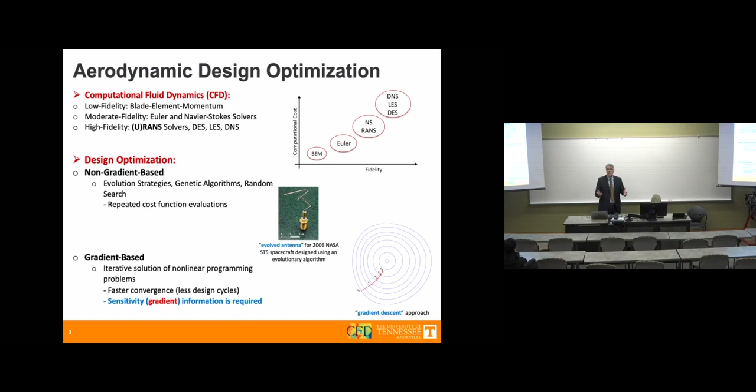So the important thing here is the gradient information, which is a derivative—it can be very difficult to calculate. And if you have an existing CFD code, it may be difficult to come up with the optimization scheme, so we have to use some smart way of approaching the problem.

So all of the results I'm going to present today are based off of the automatic differentiation tool that my group has developed, and we have implemented it in an in-house solver—yet another in-house solver. But we wanted to have something flexible, that can be applied to different flow regimes.

Now I'm getting into the dangerous territory of having a single solver solving all problems. No, every solver has its limitations, but if you know how you're handling the problem, then you can get pretty reasonable engineering accuracy solutions. So our solver is called UNPAC.

It's grid transparent, meaning it can assume unstructured mesh, structured mesh, or a combination of those. So that's a good positive thing to have.

And it's Reynolds average Navier-Stokes with time accurate and harmonic balance time integration schemes. Harmonic balance is important because if you have a time periodic flow, it reduces down the computational time significantly. And that was my bread and butter when I was at Duke University when we were doing turbomachinery aeroelastic simulations.

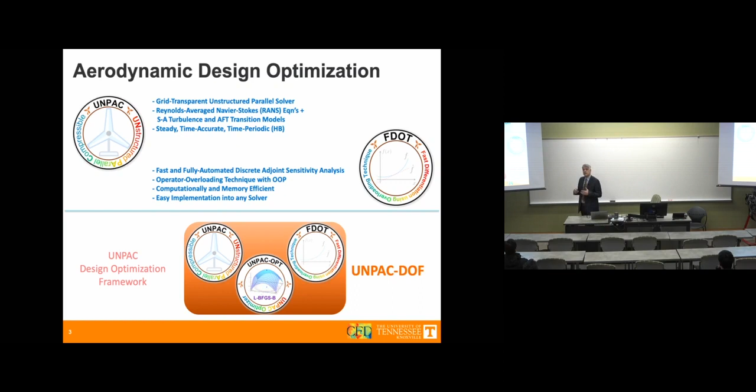That compiler takes your CFD code, differentiates everything, reverses the order, and spits out another code. So, of course, because this is done at a compiler level, the number of bugs that are introduced during the process is quite large. So you have to go back and hand check everything. Although that's an extremely useful tool, it still requires a lot of user intervention.

So our flow solver, as I said, is called UNPAC. Nothing special here, a couple of things that we focus on. It has the Spalart-Allmaras turbulence model with Dr. Edwards' modification. And we have Coder's AFT transition model, so we can predict the transition for natural laminar flow configurations.

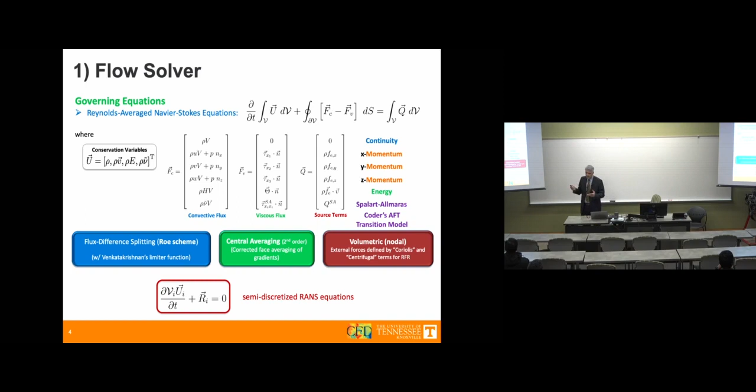The adjoint solver—I'm just going to define the optimization problem first. We start with an objective function I. I apologize, I'm not very used to using these. What can that be? Lift over drag for turbomachinery applications, minimizing the total pressure loss. It can be anything that you define.

So the problem with adjoint methods is once you change your objective function from something to another thing, you have to recompile the entire solver to get the adjoint version.

So here R is the residual of the CFD solver. As I mentioned before, most of the optimization problems are done in steady state, but nature does not really behave that way. There's always unsteadiness, but so far every flying configuration has been mostly designed based on steady assumptions, time average assumptions.

The idea is if we have to drive the residual of the CFD solver to convergence, that's a positive for us. If it's an unsteady problem, then that completely breaks down. But there are ways to overcome that issue.

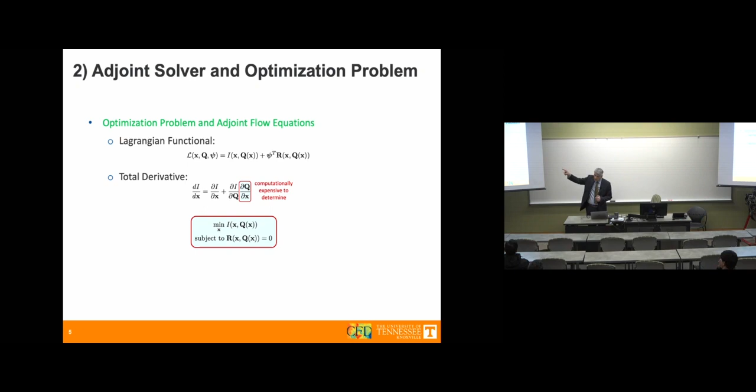So because of that, we have to do something about circumventing the computation of that term. I'm not going to go into detail. This is a classical adjoint formulation.

Apologies again. At the end of the day, if you solve an adjoint problem to the CFD using this approach, you end up with an equation something like this. So dR/dq is the Jacobian transpose of the residual of your Jacobian for your CFD solution. Psi is the adjoint variable, and this can be easily calculated using a differentiation tool.

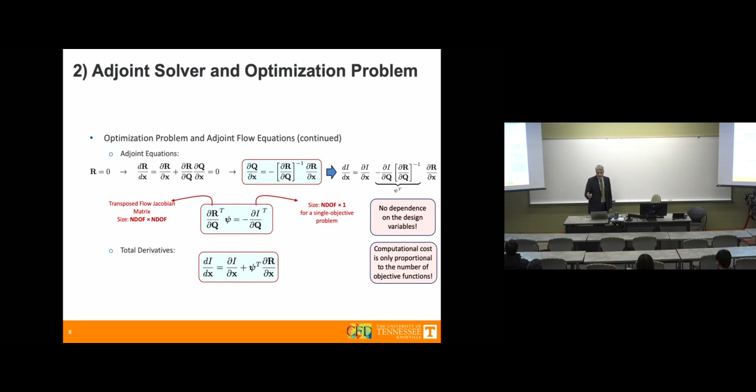Once you have your psi, then your objective function can be calculated easily. So the size of this problem is much smaller than calculating the objective function and taking the derivative with respect to each design variable.

So there are two approaches in adjoint design optimization. The first one is the continuous approach. This was first applied to computational fluid dynamics by Jameson, Anthony Jameson. If you work in CFD, you may know him. But it is the first approach, though it requires significant code development. So we tried this for simple 1D nozzle problems. Yes, it can be done, but the boundary conditions are the killer. It's almost impossible to come up with a good way of approximating the boundary conditions.

The second approach is the discrete approach. This is most commonly used by designers, but as I mentioned before, it's cumbersome because it requires source code transformation like Tapenade. You feed in an entire CFD code, and what you get is not a working code. So you have to really spend a lot of time to debug that, to make it work. And another thing I mentioned before is anytime you change the objective function, you have to recompile your code, right? It is not really feasible if you want to define objective functions on the fly.

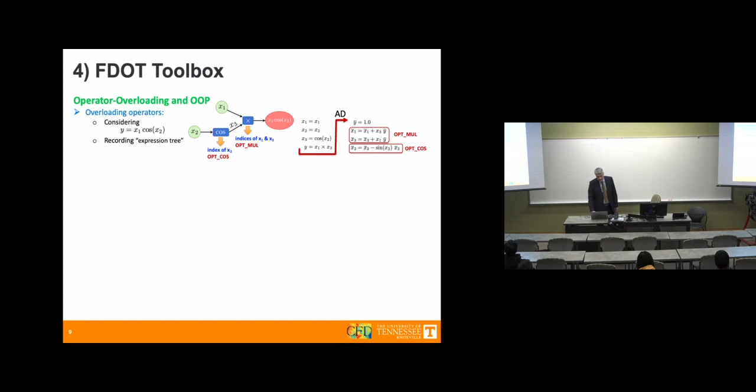So once you have that, the solver spits out an equivalent code, or the compiler does. Our idea is, starting with elementary operations like multiplying two numbers and then taking the cosine of the product, for example, what we can do is use what is called operator overloading. If you know a little bit of computer science, you can define variables to have multiple values—so you can define a new variable that has the CFD solution stored and also its derivatives stored. You can use operator overloading to redefine elementary functions. For example, when two numbers get multiplied, your adjoint solver may multiply those two variables and also take the derivative. So you have to go in and redefine all your elementary functions: multiplication, division, cosine, sine. If a sine function is called, you have to input that the derivative is cosine. And there is also the chain rule. Probably 40 or 50 fundamental operations need to be redefined.

So the idea is, if I take my input, a CFD solver is nothing but a finite number of function evaluations. You initialize your flow field, you do some operation to your flow field, and it ends up with function 2—so this is an accumulation. You can think about this as a big tape. At the end of the day, your output is what you're interested in, your objective function.

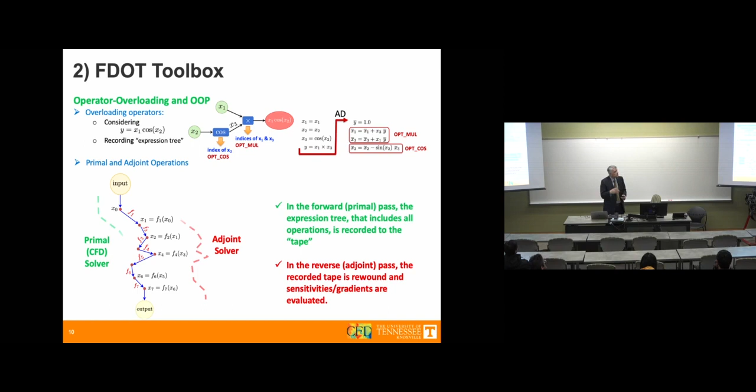The important part is, if you have a fully converged CFD solution and you run one iteration, the solution is not changing anymore from one iteration to the other, you only need one sweep of that operation tape. What you then do is take this and start from the end, then go way back to the starting point. This way, in the adjoint solver, you calculate your derivatives and have your sensitivity information calculated.

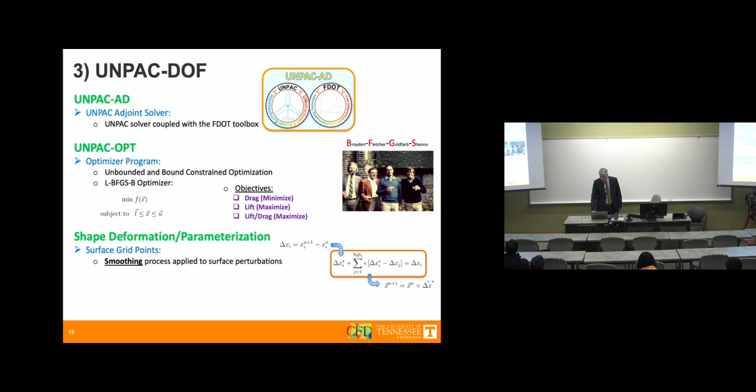But this is simply like a Newton method to converge to a minimum solution. Okay, so boring stuff out of the way, I would like to show you how we apply this idea to some problems.

This is very classical: the design optimization starting point is at a NACA 0012 airfoil at a Mach number of 0.8 and angle of attack of 1.25. The original solution yields a strong shock at the suction side and a weak shock on the pressure side.

Also, the design variables are defined by FFD. FFD stands for freeform deformation box — this is like Bezier curves. So if you think about somebody playing a puppet, if you pull the string a little bit, it smoothly changes the shape of the airfoil. This is very commonly used in aerodynamic design optimization.

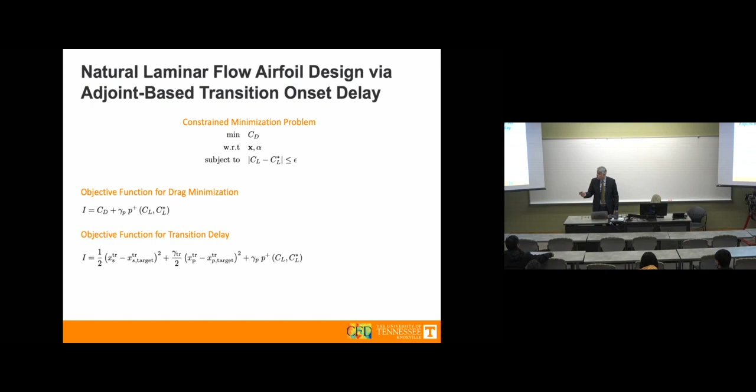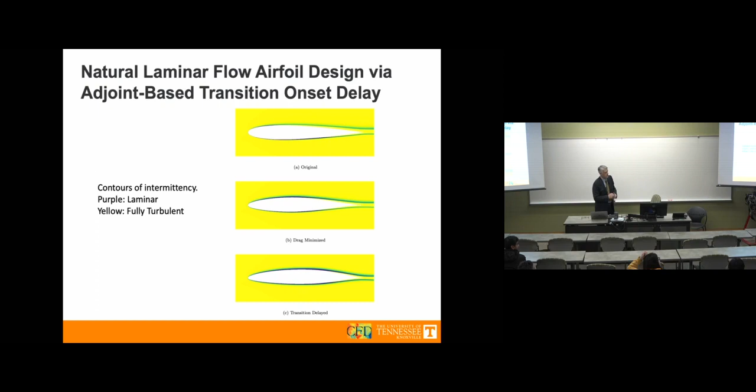How many minutes do I have? 15, okay. Any questions so far?

All right. So I have a question. I've done optimization of surfaces for drag reduction using software like iSight and things like that, where we don't really change the equations, we are just using an automated, traditional scheme. So yours will be a lot faster than that, do you think? Yeah, so is iSight similar to what Dakota does, like runs a lot of CFD simulations and does a stochastic approach to minimize? So you can set one objective function and basically run the whole thing.

Run the whole thing, so it takes quite a bit of effort, right? Typically it takes one week for one case. So yeah, okay, so here you can see for this case, a gradient-based design optimization will require 6 cycles. 6 cycles include 6 CFD solutions and 6 adjoint solutions. So an adjoint solution is about 3 times the CFD solution, right?

So it's about 24 CFD solutions worth. So I don't know how many, 144. So this cuts down quite significantly the optimization time. Of course, it also depends on how many design cycles you have to do.

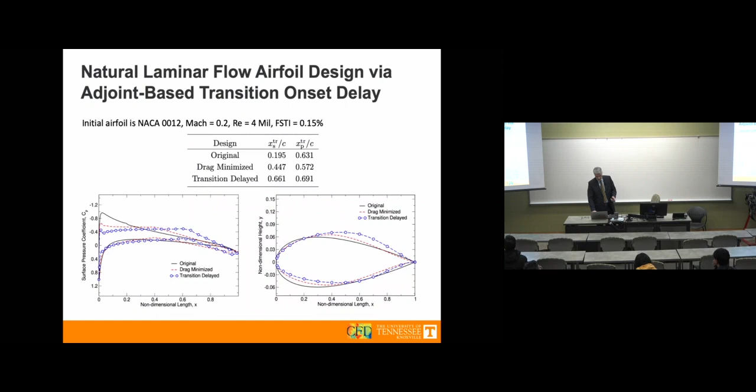So another thing that we use this method for is to calibrate an existing transition model. So the Coder's AFT transition model and others like Langtry-Menter, they depend on free stream turbulence intensity as an input. And using that, there is a relationship called Mack relationship that is a curve fit to experimental data for flat plates. And it defines the critical amplification factor, N crit.

So e to the N based models, when they reach that amplification factor, they assume that the transition has happened and the flow changes from laminar to turbulent, right? And we have done a lot of research, and we found that to match the experimental results, in literature, everybody had to fine-tune either their turbulence intensity or critical amplification factor.

So our goal was, can we use the adjoint sensitivity information by inputting the turbulence intensity? Because that is the wind tunnel, right? So that setup, you trust what it is. If we can come up with a modified version of this calculation of N critical using adjoint information, can we get away without fine-tuning our data?

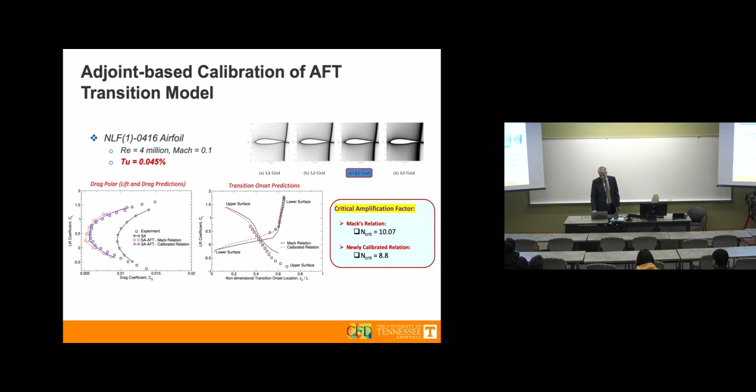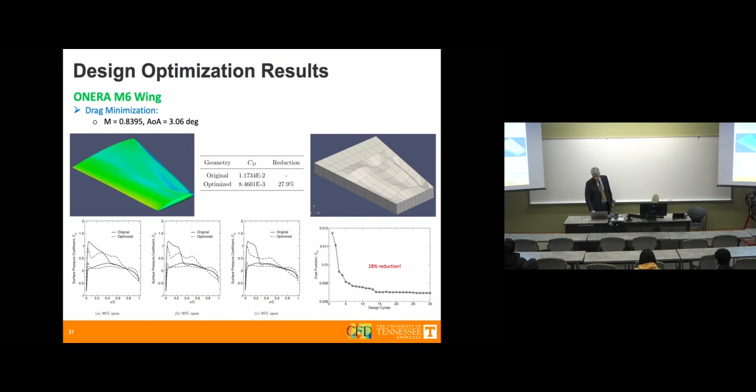All right, so to conclude, hopefully I didn't bore you guys too much. Hopefully, if you're working in design optimization, aerodynamic design, or you will be working in aerodynamic design, this gives you an idea about how we can improve our process. And I haven't shown you too much data, but this tends to be very memory efficient and we have shown this to be applicable to many different solvers.

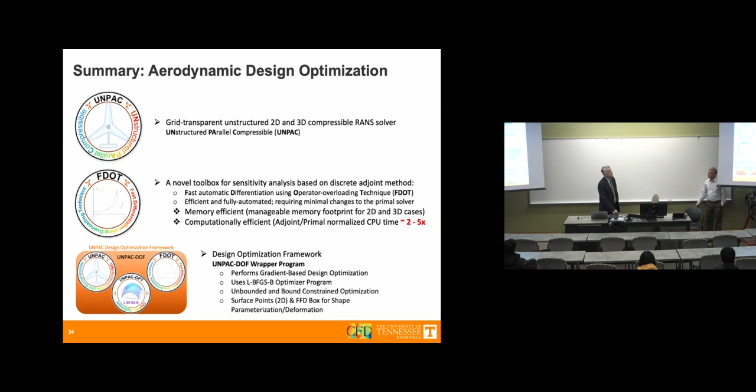Really nice work. I have a couple of questions. First is, do you have plans for taking this to, say, 3D wing optimization or more complicated multi-objective design optimization? Yes, absolutely. So this is for the wing optimization. What we're working on now is we have another method called one-shot method to predict limit cycle oscillations in aeroelastic systems. So we would like to couple that platform with this to aeroelastically tailor our wings.

The second question is, you may be familiar that there is this new language called Julia, which is generating a lot of buzz, and it's got automatic differentiation capability. Any plans for evaluating that? We have the working version of this toolbox for Fortran 2003 and C, C++ at the moment. But we know the idea, it can be extended to Julia.

One of my PhD students actually, who is doing some kind of machine learning in CFD applications, is using Julia because it's so modular. There are so many whistles and knobs he can play with. But we haven't developed the Julia version. It's a huge effort to convert to a different language. Yeah. Thank you. But anything you have in Fortran, we're happy to share this, and you can try.

Very impressive talk. According to your last couple of slides on your conclusion, I assume the current adjoint-based method is built upon a steady solver, right? Yes. So my question is, can you comment on the challenges that we may encounter if we want to extend this adjoint type of approach to solvers that are intrinsically unsteady? For example, LES, DNS.

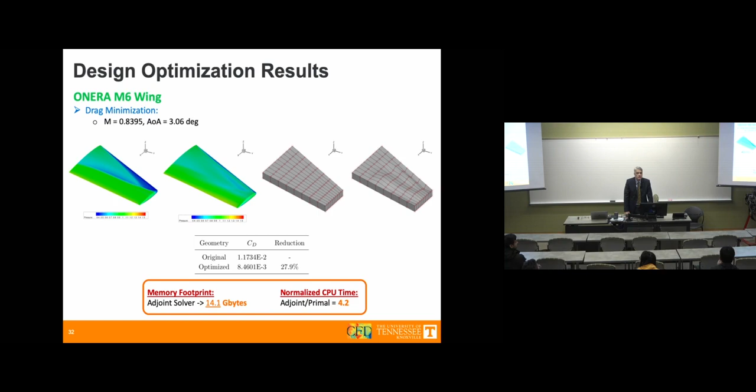I have one question about the optimization. When you optimize the shape, you might get an undesirable shape. How do you bring in constraints for the shape optimization? That's a perfect question, and that's exactly the problem we were having.

When we used surface points as design variables, before we started using FFD box which can somehow guarantee the shape, the airfoil would try to have negative thickness - the pressure and suction sides would try to overlap or cross. So what we did was restrain that: we said the thickness cannot go below 90% of the original. There are all kinds of constraints you can impose.

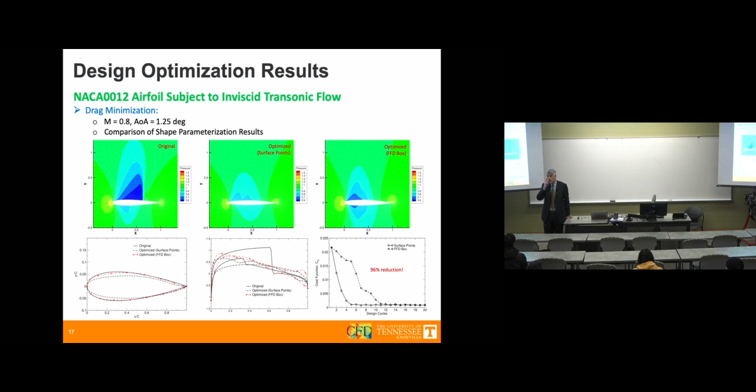Then it can be, but it depends on the Fortran version. Wolfram, what is the latest? I'm not real familiar with that.